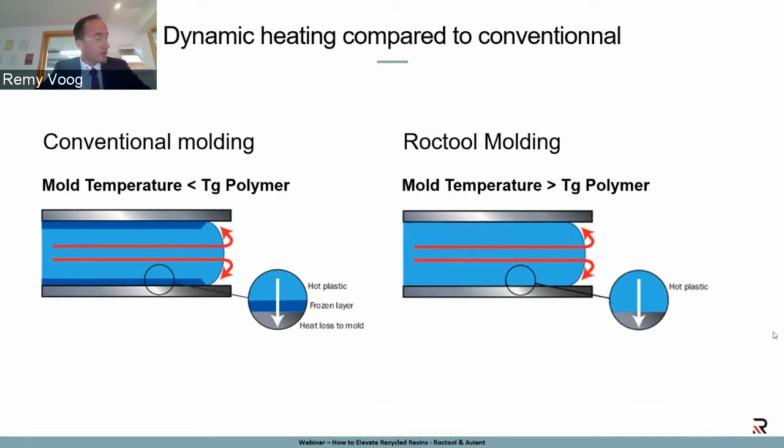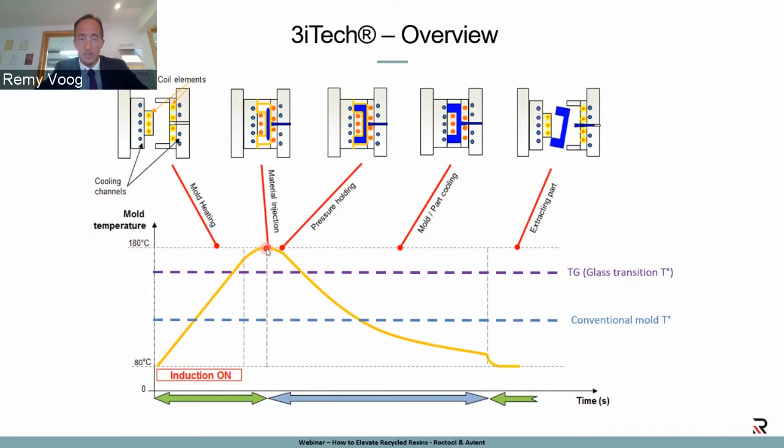So this is how it works. If you take, for instance, a PC, you go from 80 to 180 degrees. Let me take my pointer. This is time and this is temperature, right? So in conventional molding, you'll have a stable temperature, more or less, in the molding surface, whereas in Roctool, you're going to have the luxury to change your temperature dynamically. So you're going to go above this glass transition temperature, and then you're going to do what you have to do - you're going to inject your part, you're going to compact it. And as I said before, if you give the time for the polymer chain to realign, you will decrease the anisotropy, and that's what we're doing here. You do what you have to do, and then as soon as everything is done, you go and cool down.

So what does it look like inside the mold, right? The important point here, the very important point, is you have two different channels for heating and for cooling.

So you have this luxury of having different heating and cooling profiles. Basically you will drill or mill inside your mold holes to pass the inductors. I'm not going into the physics of induction in detail, but basically you'll have holes from 4 to 10 millimeters away from the molding surface, and behind that you'll have water channels that flow continuously. You never stop flowing the water channels.

So what do we sell? We basically provide a service, an engineering service that will define exactly where those holes or grooves need to be positioned. And that's a fine art.

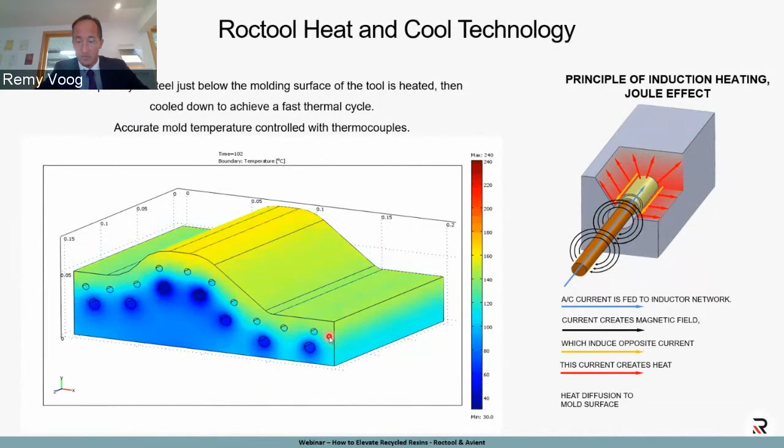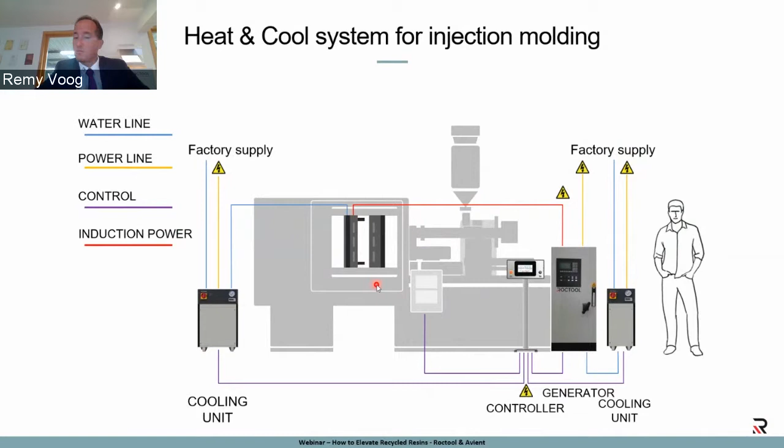And number two, we provide equipment, whatever will be required to turn a standard mold into a Roctool mold. You're talking about inductors, connection boxes, wires that can cope with the very high voltage and currents we use for this technology. That's number one. And number two is the generator, which is the heart of the technology, and it's going to generate this very strong current every 45 seconds, day and night.

So this is actually my last slide, just a quick introduction. Roctool is known mostly for aesthetics—we're talking about improvement of gloss, which is a big added value for the rest of the presentation that's going to be done by Etienne and Calypso and the demonstration. Removal of defects, as I said at the beginning, with weldlines and sink marks, because you don't have this frozen layer, and then replication of very fine textures. This is what we're known for, but that's not everything.

We also—and as I said at the beginning, in some industries they don't really use this one—more use the decrease of scrap rate, because we're using electricity, and electricity is a very stable process, very stable physics. We are also used for flow improvement. If you have very long parts, very fine parts, you want to improve the flow.

Roctool is used for stress reduction. As I said in the first slide, we reduce the anisotropy, and we can be used for cycle time reduction because we can use cold water to cool down the mold. And of course, dimensional stability, because at the end our job is to control the mold surface temperature, and we are experts in that domain. So of course, if you control the mold temperature, then you control the dimensional stability of your part.

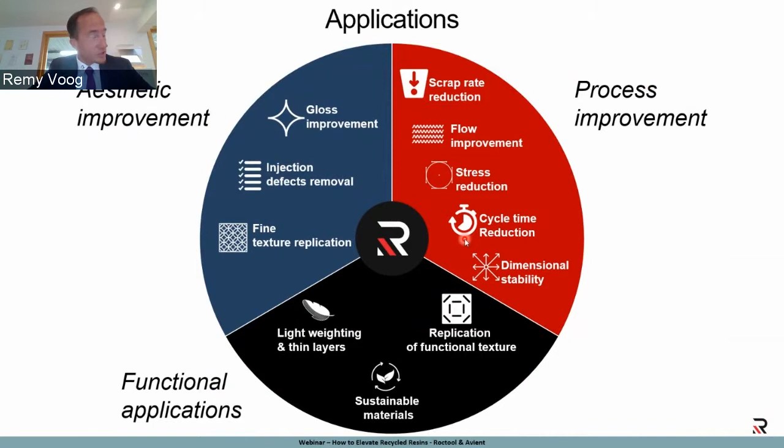The aim is reducing the material part on your part, and of course the sustainable material, which is going to be covered by Etienne and Calypso in the rest of this presentation. Back to you, Virginia.

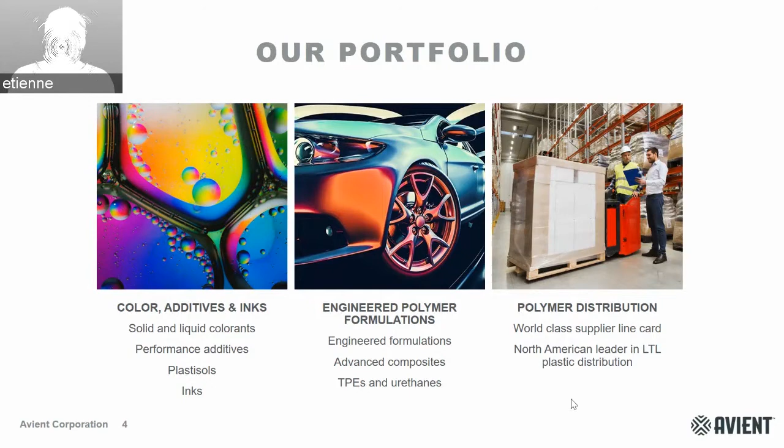Related to our value proposition, we are present in three different segments: color, additives and inks; engineered polymer formulation; and polymer distribution. On color, additives and inks, we provide solid and liquid colorants, performance additives, plastisols, and inks. We also provide engineering formulation, advanced composites, TPEs, and urethanes. Finally, for polymer distribution, we are a world-class supplier line card for a North American leader in plastic distribution.

So related to how we can improve sustainability while maintaining aesthetics, the main concern is to guarantee an acceptable aesthetic level. As a starting point, ABS has been the dominant material for closures in the packaging industry, but the market is moving towards more sustainable solutions. Avient is developing more sustainable solutions while maintaining excellent aesthetics, ideal for use in luxury packaging.

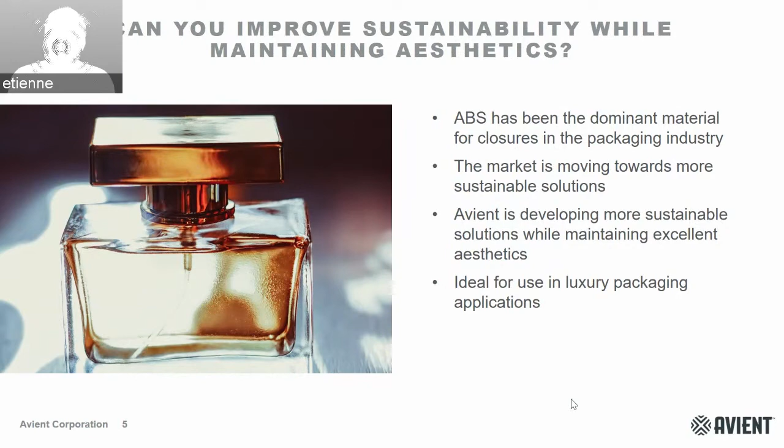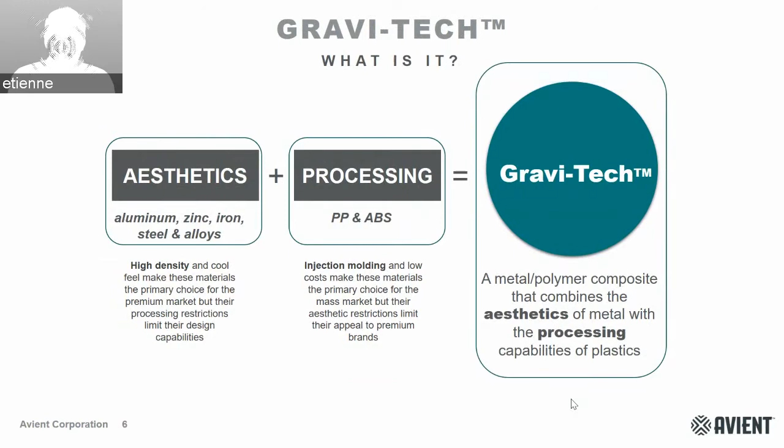So when it comes to electroplating, after a long testing campaign with an electroplating partner, we have been able to formulate different materials that offer some of the best results for electroplating on the market. On the screen you can see the main characteristics: the quality aspects and the adhesion test. For different materials, we have been successful on both tests.

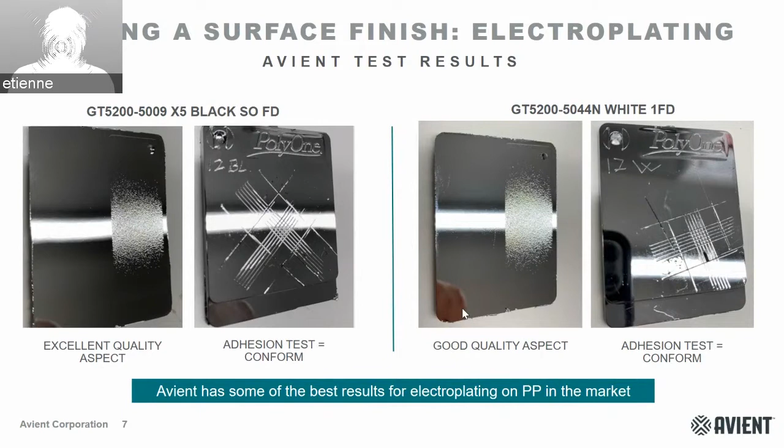Here we are talking about PP-based material. We have performed some tests first on plaques, and currently we are making tests on existing products to confirm the results. We have been able to launch on the market electroplatable polypropylene with different density levels for cosmetic and spirits closure applications—density 1.9 and 2.5—and we are working in parallel to develop other density levels.

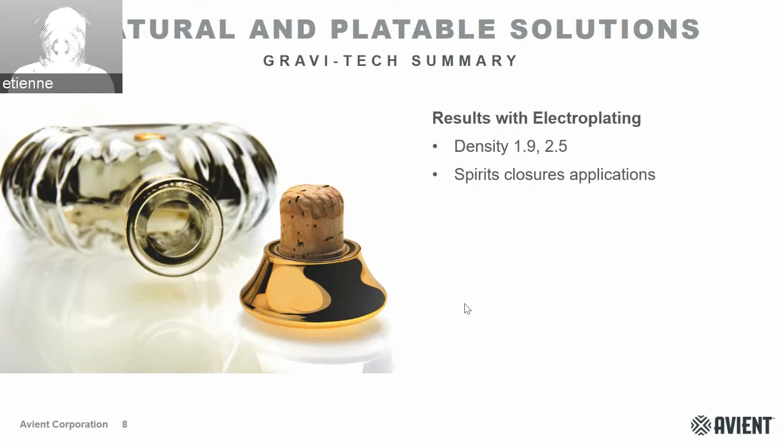When it comes to improving sustainability, we are now focusing on post-industrial recycled polypropylene, black polypropylene; this solution provides a styrene-free solution with a lower carbon footprint versus ABS. As you can see on the graph, the CO2 footprint of ABS compared to polypropylene and high-density polyethylene is half lower on the polypropylene side. The polypropylene also improves chemical resistance versus ABS. We maintain prime polypropylene performance, and we have lower rigidity than ABS, ideal for new designs.

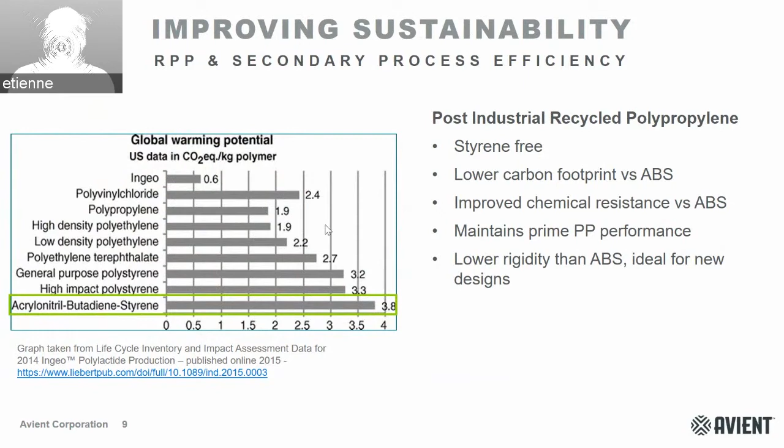Here you can see what we have done with Roctool. We worked on custom formulation and also used the Roctool technology. On the left you can see the result without the Roctool process, and on the right the result with the Roctool process. The advantage is a quite similar ABS quality surface aesthetic, high material brightness, lower mold pressure required, and good material flow characteristics.

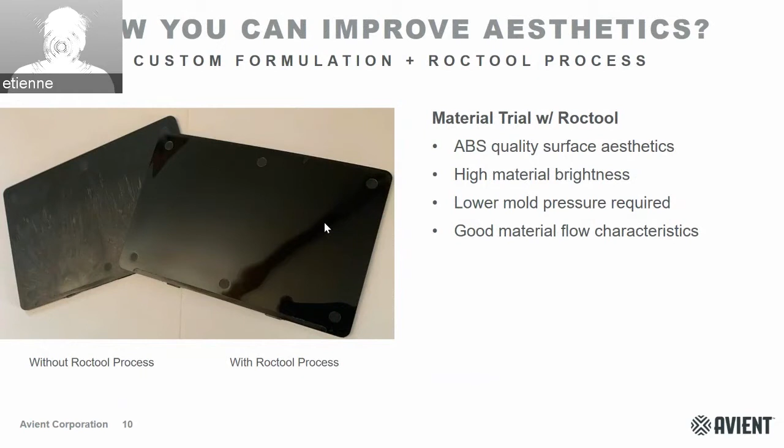Just to summarize, by combining the Roctool technology and Avient material, we can have a great aesthetic without secondary operations.

We can improve sustainability by making less CO2 consuming choices, replacing ABS by polypropylene, using recycled material, removing secondary operations, improving surface aesthetics, removing the need and cost for secondary processes like painting, assembly, and metal ballast sourcing, simplifying the design, and reducing the number of components used.

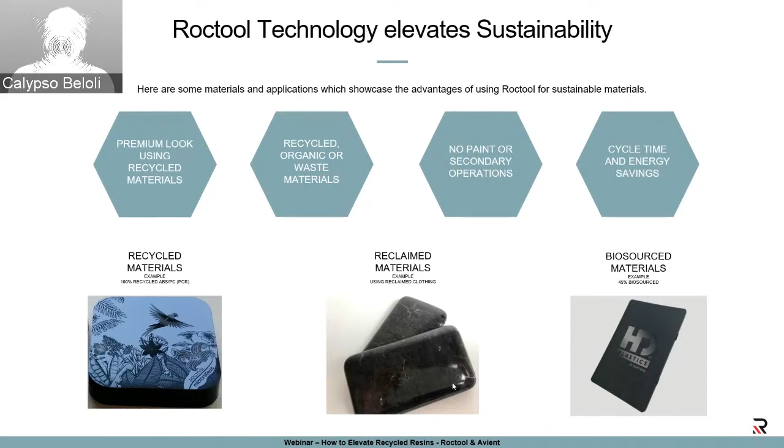So now let's go to some examples of what we are able to achieve with Roctool technology and recycled resins.

First example, it's a PCR resin. At the left, it's 100% recycled ABS. As you can see, we have good surface aspects, elimination of the blush at the middle of the part, no defects, and ultra gloss on the part, good improvement compared to conventional parts, and perfect replication of the surface, in particular around the eyes with the holographic effect.

On the right, it's a PP PCR, 100% also, and in this case, we can see a perfect surface aspect, no weld lines here, and perfect replication of this structure using Roctool technology.

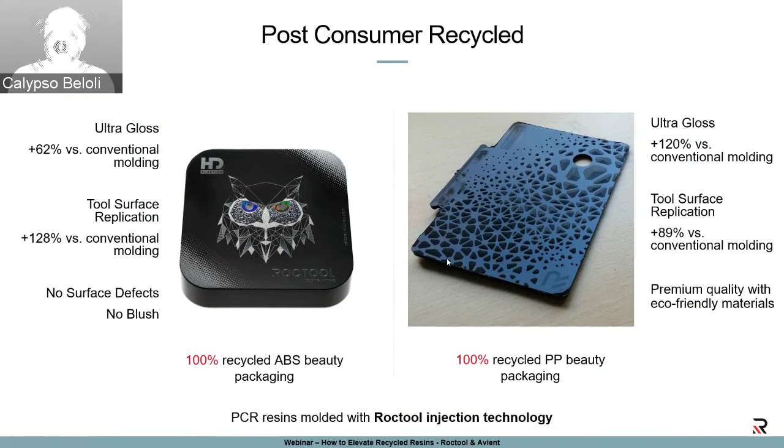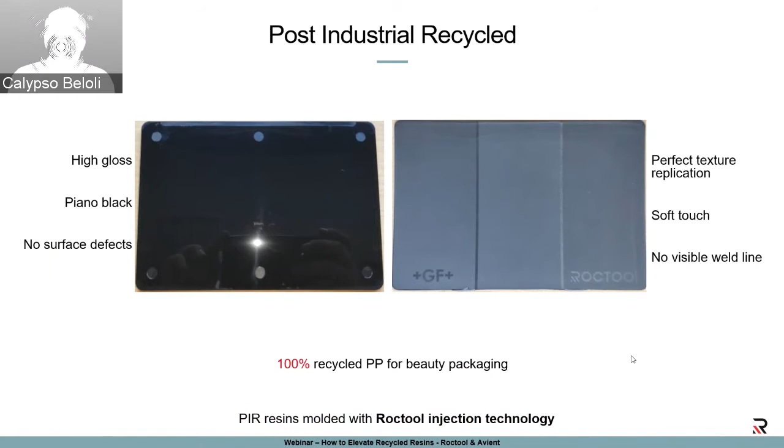Other materials, a PIR material, a PP from Avient. This is where the story with Avient starts. They came to us with this PP with mineral fibers and mineral fillers, and the idea was to see how much we can improve the part. Here you have the results, as Etienne also presents, but also in terms of replication and soft touch effect.

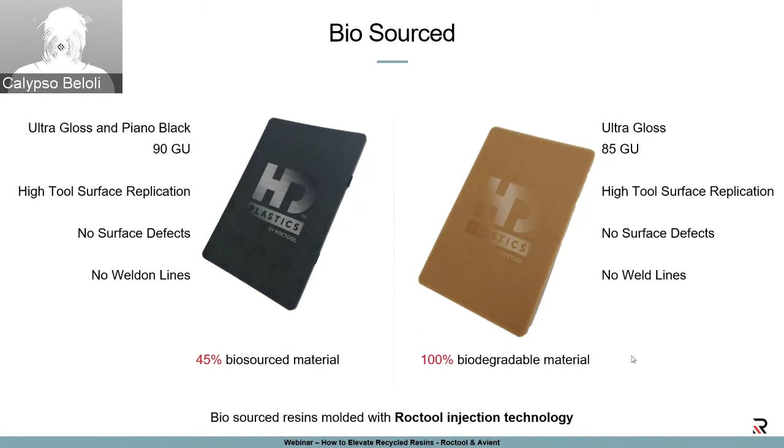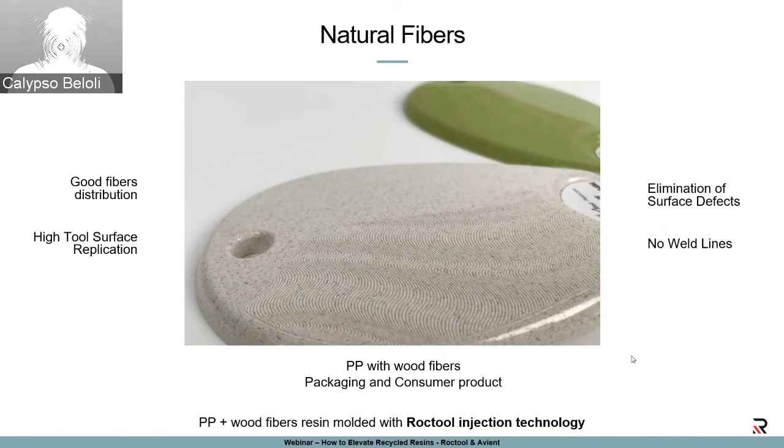So we've seen some examples of what we can do and how much we can improve the quality aspect of the part. Now I am going to explain how we can also be sustainable with Roctool.

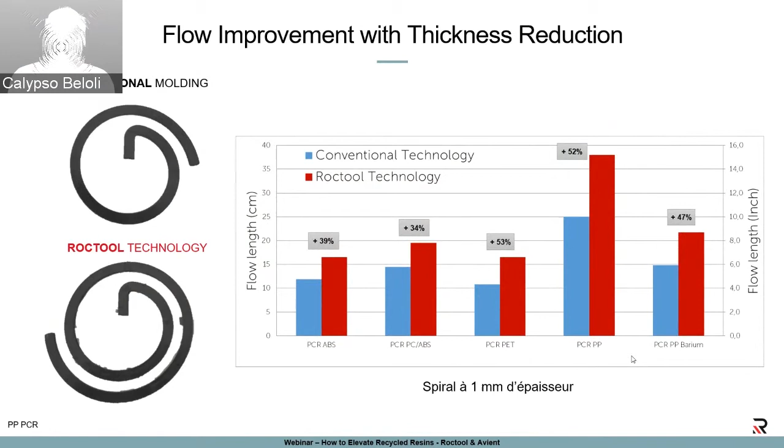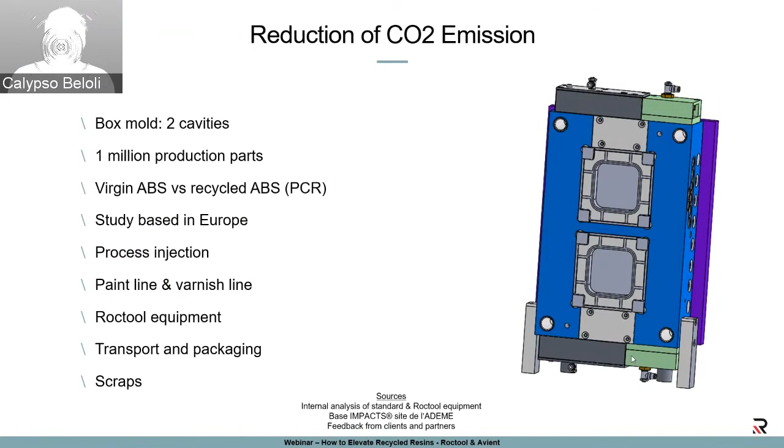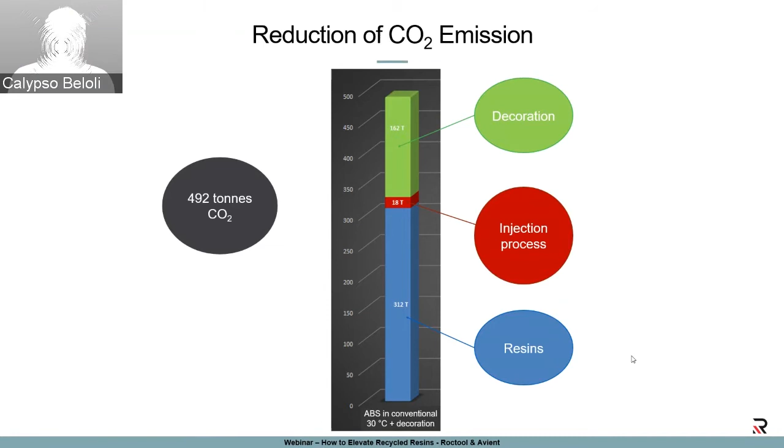So the first case is ABS in conventional process, 30 degrees, with decoration in order to obtain a very good surface aspect. In this case, you'll have in blue the resin, in red the injection process, and in green the decoration. To produce 1 million parts with this mold, you will use 492 tons of CO2.

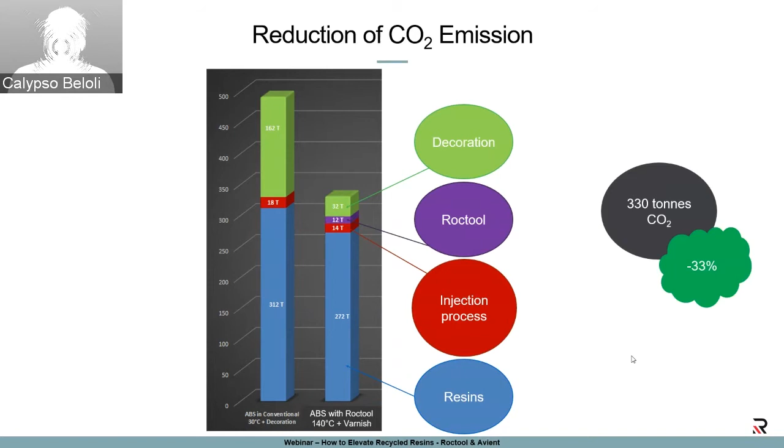So in this case, we reduce the CO2 emission by 33%. That is already very interesting. Now let's go to another step.

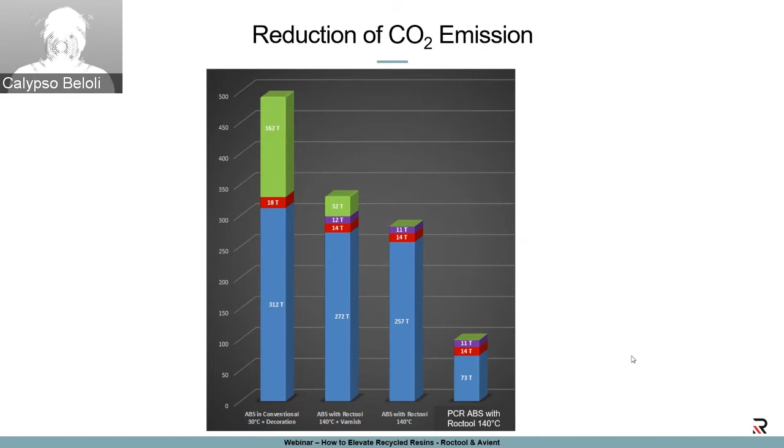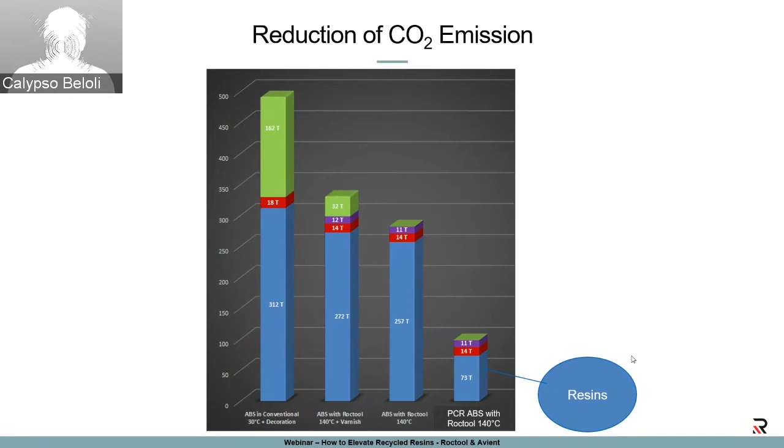And the last point, and not the least, is a comparison with PCR ABS with Roctool. In this case, you can already see a huge difference. Why? Because as we recycle the material, we reduce the CO2 emission from production because there is no production, it's just recyclability. Then we keep the same amount of injection process and Roctool. So in this case, the reduction is very huge. It's 80% CO2 emission reduction.

So it's very interesting to see what you can do. You can go to a completely sustainable project with PCR ABS with Roctool, but there are some steps in between that you can evaluate for your next project.

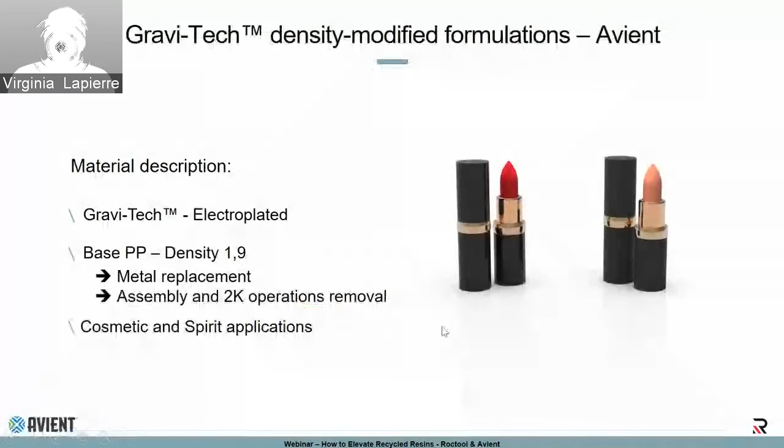So I will detail more the material that will be used during the live demo. We are talking about post-industrial recycled polypropylene. It's a density 1.9 material, mainly used for metal replacement, for the ballast effect. You also have the cool touch with this material, and it can be used for assembly and 2K operation removal, to simplify the design and assembly of devices like lipstick. This material is mainly used for cosmetic and spirits applications.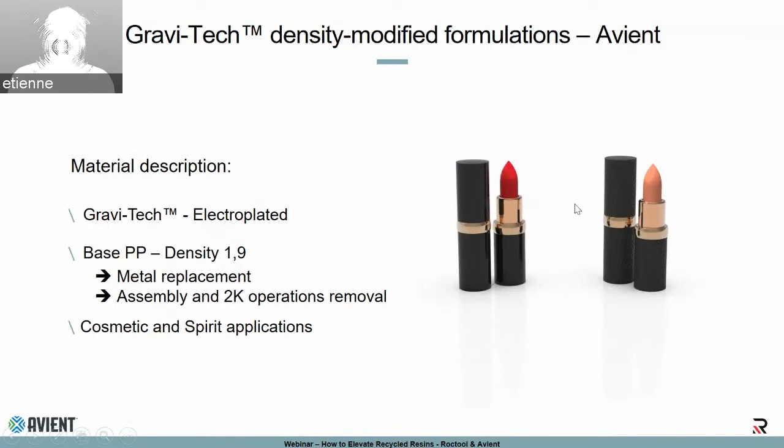And when it comes to the mold characteristics for the live demo, Roctool will use a 2-cavity mold with one heating side. The mobile side will be heated. And as I said, we will use the polypropylene resin from Avient with the Gravi-Tech material.

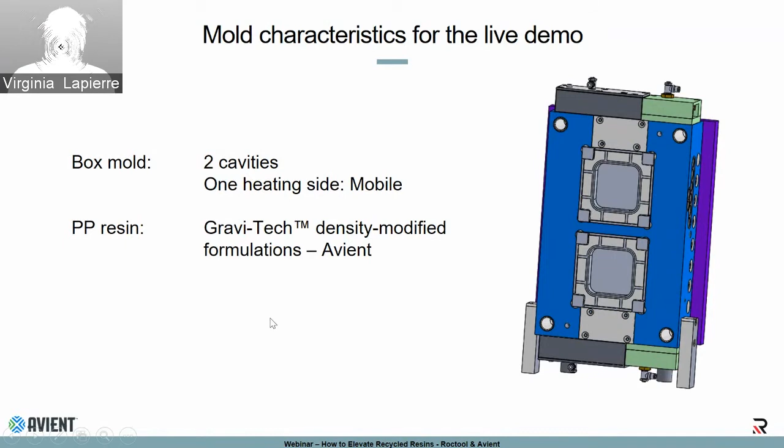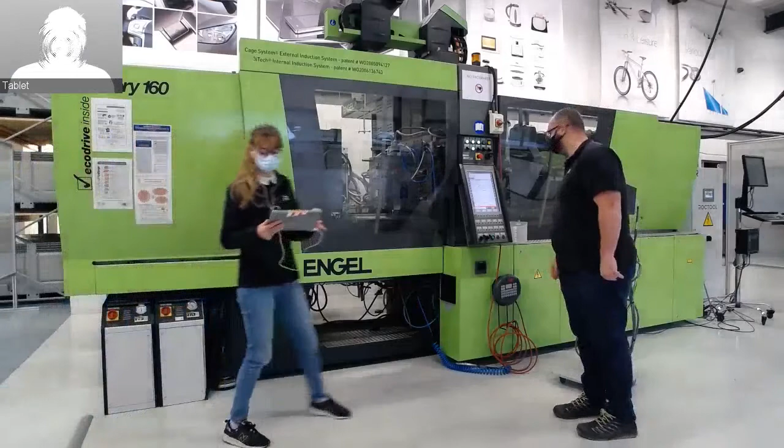Okay, welcome to our demo center. This is our injection machine. This is David, he will perform the trials for today. The idea is to use the material from Avient that Etienne presented, with and without Roctool technology, in order to compare the results. First, we are going to show you the mold.

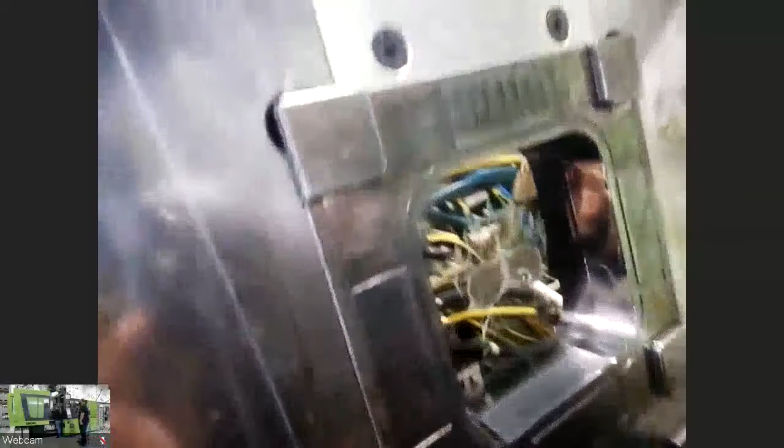As you can see, this is a cavity with a fine texture, really nice, with some holographic effect. I don't know if you see it well, but anyway, you will see it on the part. The idea is to mold now with and without Roctool. David will start without Roctool technology.

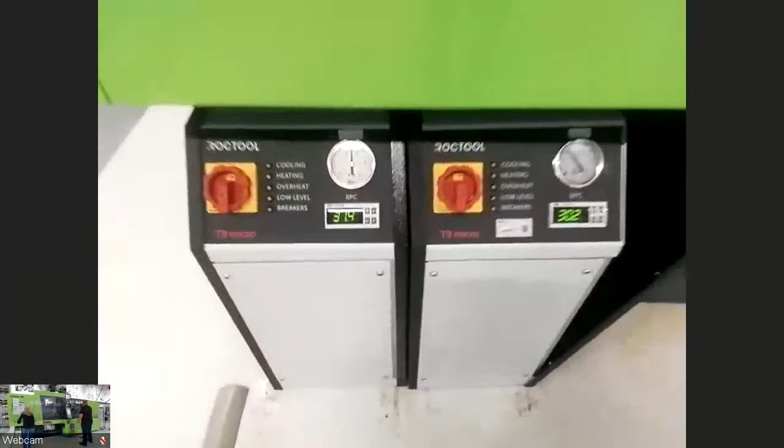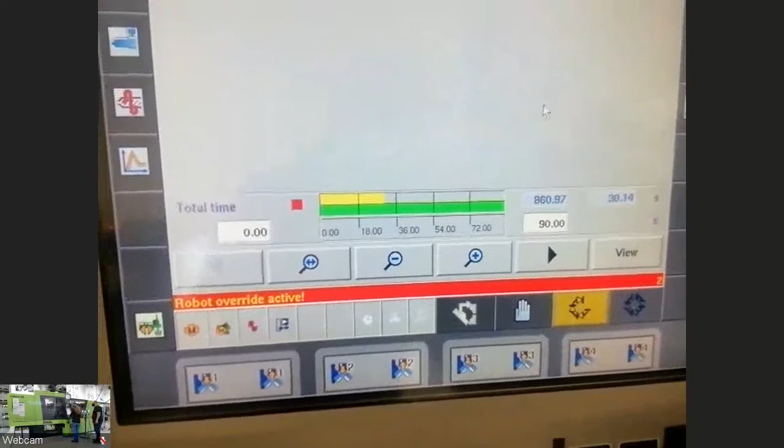So for this step, we have fixed our thermoregulator to 30 degrees on the fixed side and mobile side. We will have a look at our cycle time just here, so you will see the evolution of the cycle time for this molding. We will wait now for the demolding of the part. The idea is then to compare the cycle time with and without Roctool.

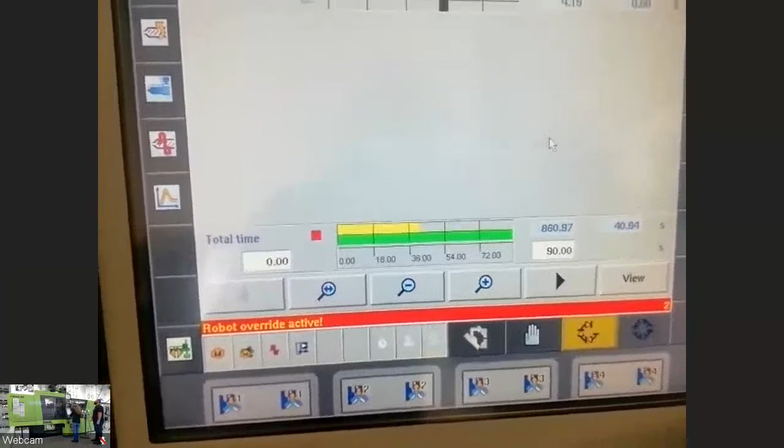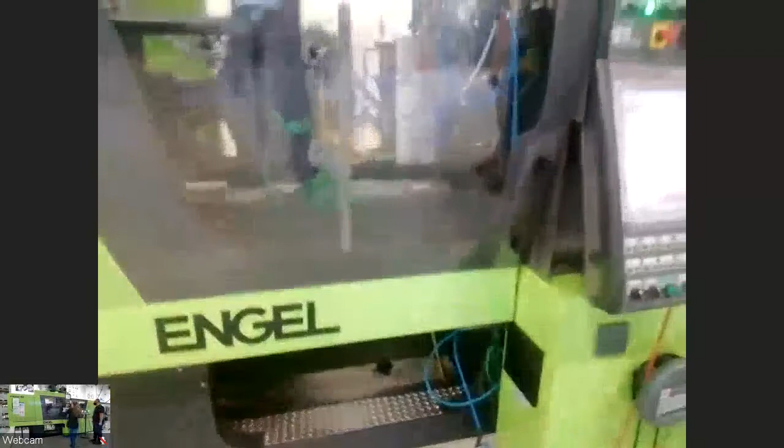Okay, it's done, around 53 seconds. And now we have the demolding. So let's see the part.

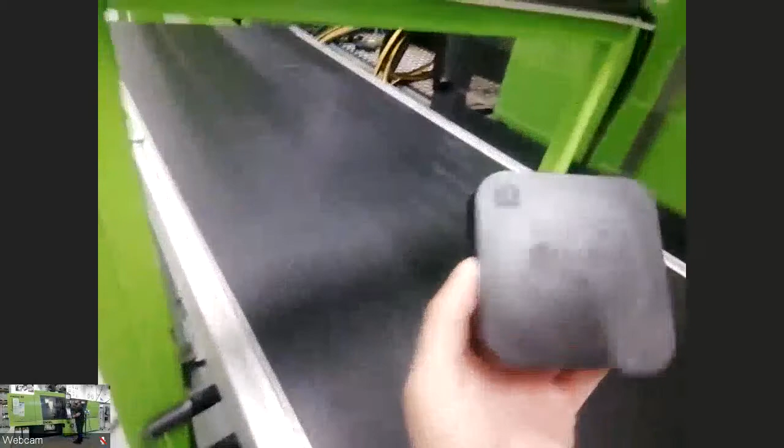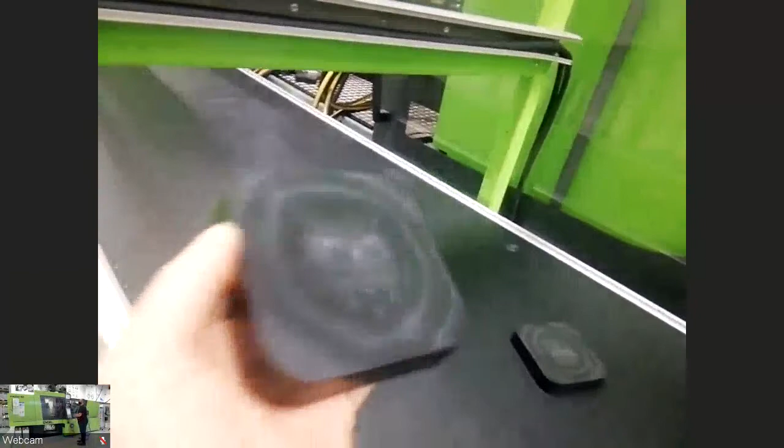So as you can see, the part is really bad. You can see this milky effect, no high-gloss surface, and the texture is very difficult to see. And we don't see any hologram effect around the eyes. So it's not a good part, let's say.

And now we will turn on Roctool to compare the results. So let's go, David, with Roctool technology.

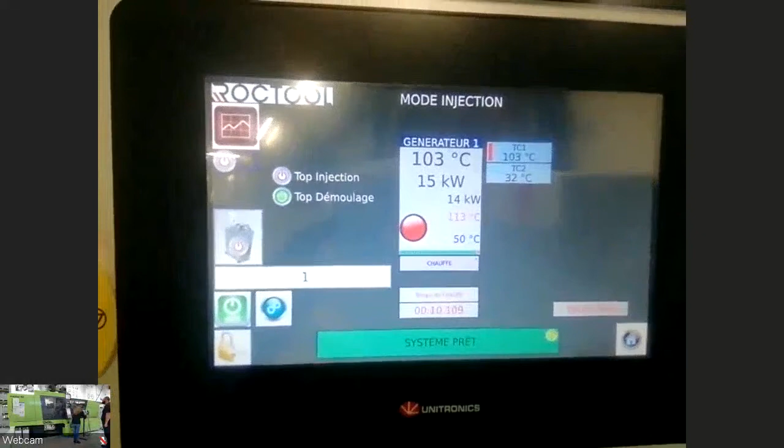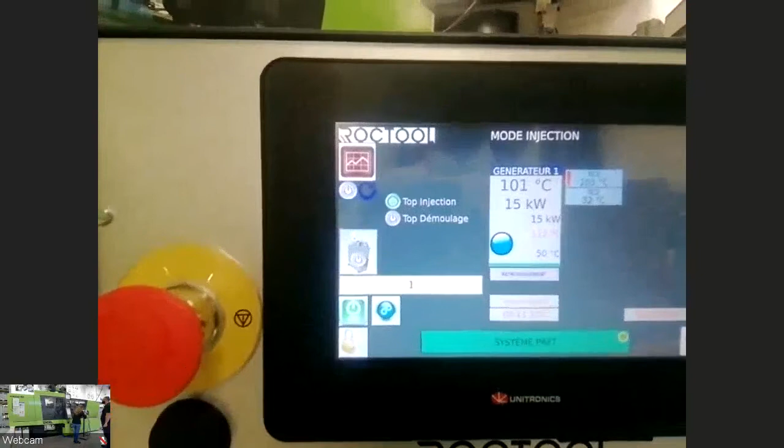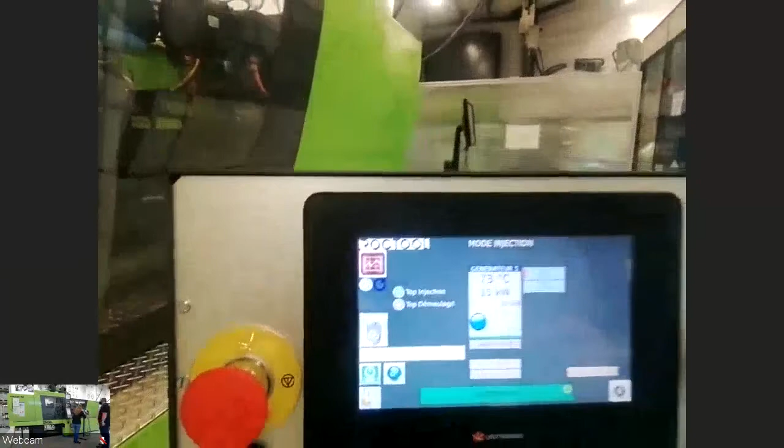So we can see on the controller the temperature increase, and we will achieve 120 for the injection. So we have just injected now, and we are now cooling, waiting for 50 degrees for the demolding. To achieve 120, we have fixed our generator to 15 kilowatt. The thermoregulator has been fixed again at 30 degrees.

And we can again check the cycle time to show you that we achieve exactly, or let's say a similar cycle time with and without Roctool technology. We are quicker. 50 seconds for this cycle. And now we can check the part.

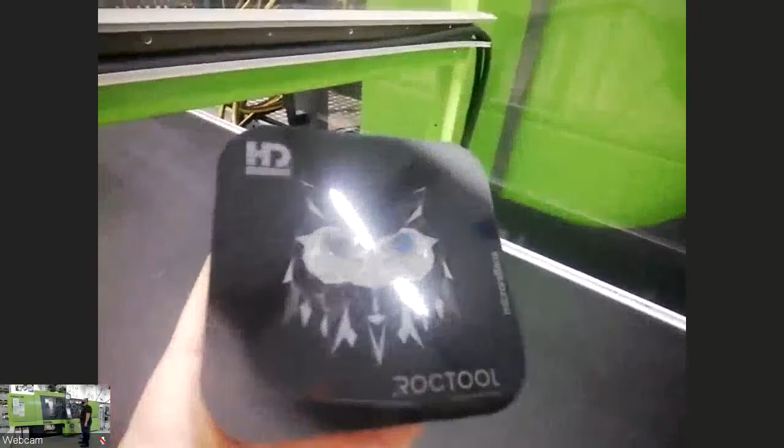Okay, so clearly, I think you clearly see the difference. The high-gloss surface, the holographic effect around the eyes, are now really clear. So we can just put the two parts together, but the difference is very huge. So let's now go back to the presentation to show you the gloss and color measurements.

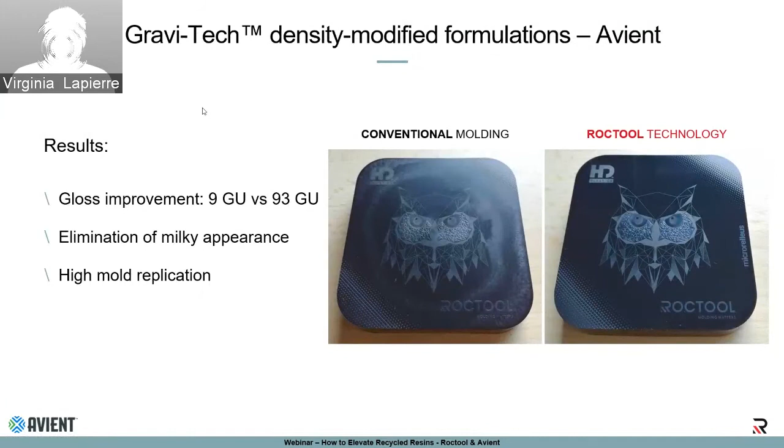Yes, thank you, Virginia. So as you can see, this is the same part that I just showed you during the demonstration. We have measured the gloss using our gloss meter, and the results are very different. In this case, we have 9 gloss units in conventional versus 93 gloss units with Roctool. That's an obvious elimination of the milky effect.

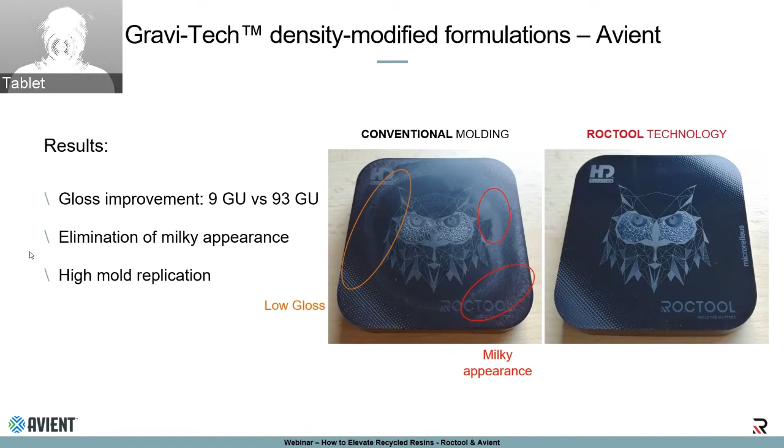Oh, sorry, I'll try to just show you. But it was obvious, yes, the milky effect and the low gloss surface, and the comparison of the replication also is huge. So the second part is the measurement of the color.

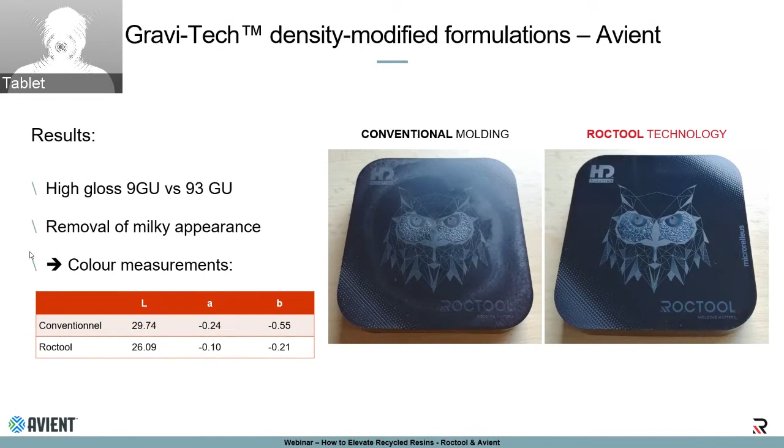So that is very interesting. We use our spectrocolorimeter to measure the LAB value. The idea is to see only the L data because it's about the black and white color. And as you can see, the L value with Roctool is lower than the one in conventional. What does that mean? That means we are deeper in terms of black intensity with Roctool. So that's very interesting, like when you are looking for a deep black, and that can be achieved using Roctool technology. So I think we've presented everything about this demonstration and those results.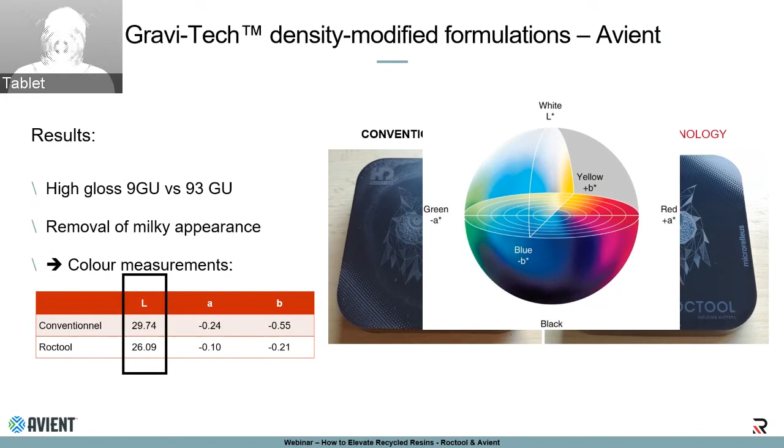Remy, who is using the recycling machines in India for automobile application? Well, this is equivalent to releasing my list of clients, which I can't do, unfortunately. No, we don't drop names, especially on a webinar.

Thank you. Let's see, who else have we got here? There's lots of questions coming in. Are there any examples of improving the weld line strength using this technology?

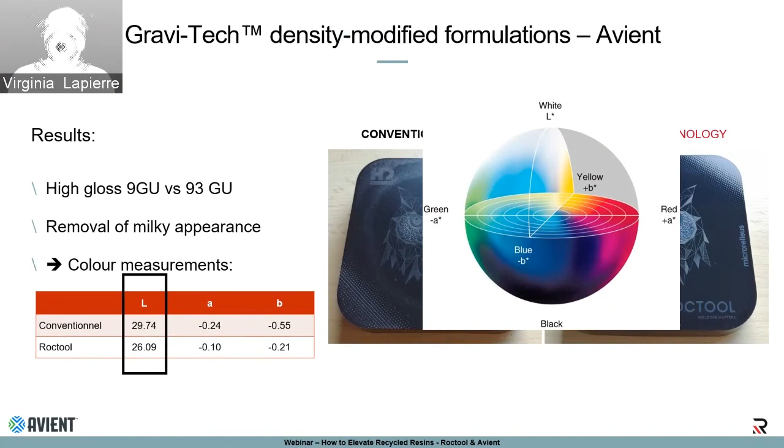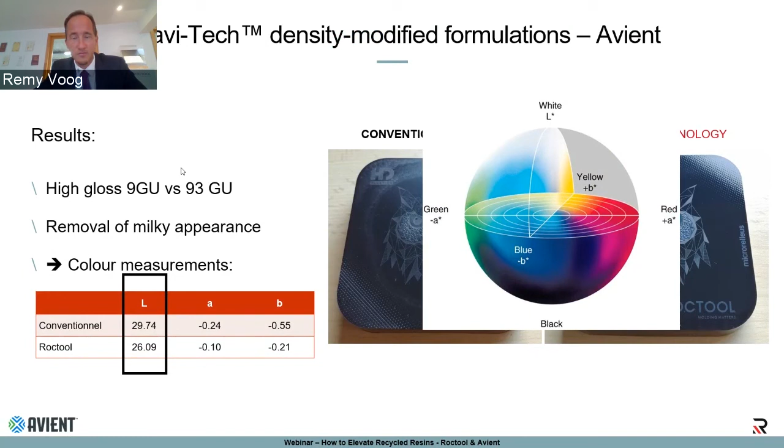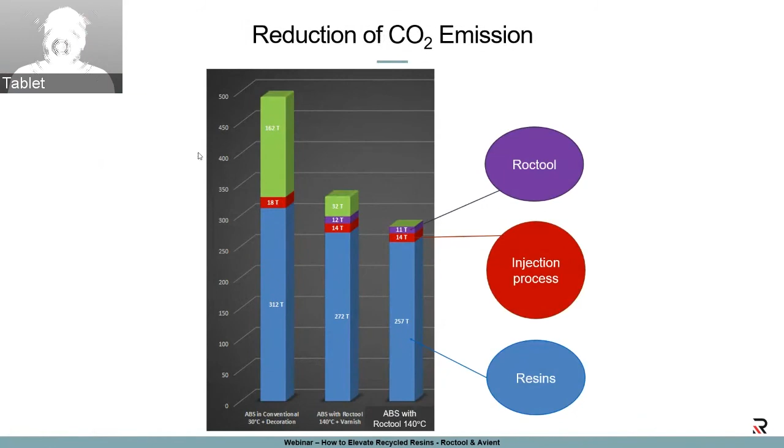Yes, and I will let Calypso comment on that. We actually have a dedicated mold to demonstrate that. Calypso, do you want to say a word on this? Sorry, I was on mute. Yeah, we have a specific dog bone mold to evaluate the mechanical performance on the weld line.

If you are interested, don't hesitate to contact Remy. Like that, we can discuss evaluation of your materials with our specific mold, as we are able to inject in one or two points in order to do the dog bones following some standard. Please come back to us and we can discuss in detail. Calypso has characterized many materials with this dog bone mold for clients, so this is business as usual for us.

Amanda is asking, does Roctool have operations in Asia, especially China? We certainly do. Remy, you can speak a little more about that if you like.

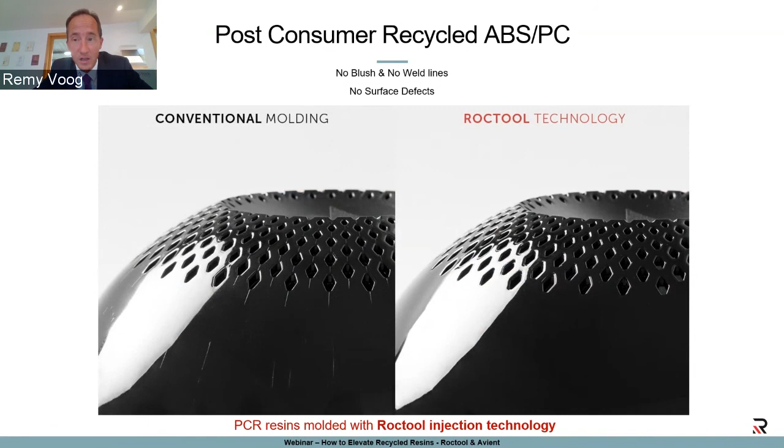To make it very short, yes, we have very extensive operations in Asia. Our chief technical officer, the one who basically created the technology, is called José Feigenblum, a French person. He is based in China and runs the business there. So just to be clear, you mean China? In China, not India. Yes. Sorry, India—no, China. It's okay, thank you.

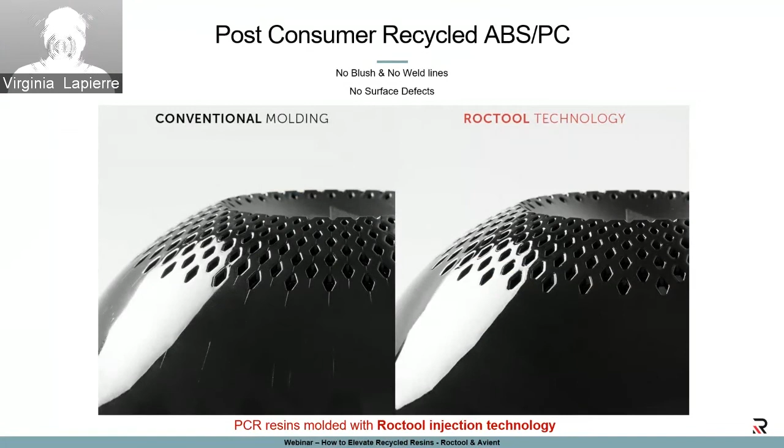A question for Etienne: is there any difference in quality between different lots of materials? We are talking here about post-industrial recycled polypropylene. Compared to post-consumer recycled material, with PIR we have more consistency and repeatability compared to PCR.

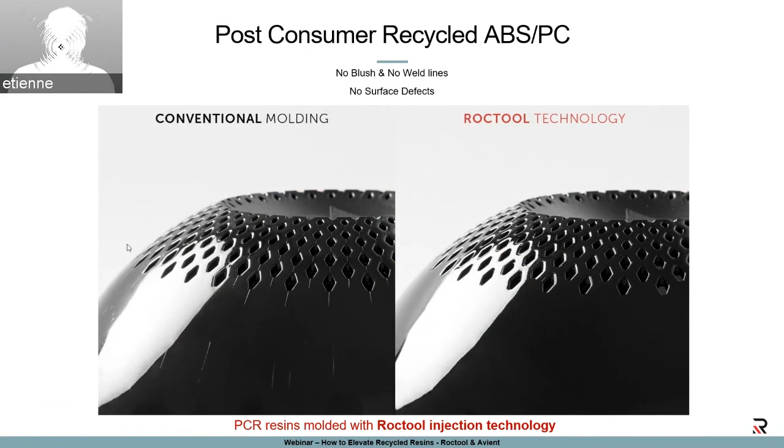Because we can establish a closed loop related to this, we are using industrial scraps, sprues, or defective parts from identified sources that we use to make the recycled polypropylene, or to make the final formulation. So we have higher traceability here, and we are able to have more consistency from batch to batch.

Thank you very much, I hope I have answered the question. Feel free to let me know if this is not clear enough.

There's more questions coming in as we speak. Remy, a quick question for you: how many projects have we completed so far, and who are our major customers?

Our major customers, unfortunately, we can't really tell due to confidentiality agreements. However, as I said in my earlier slides, we are present in most industries. Of course I cannot give the names, but in the automotive industry we work on basically every interior and exterior part, addressing different challenges to resolve, whether weld lines, sink marks, gloss, whatever.